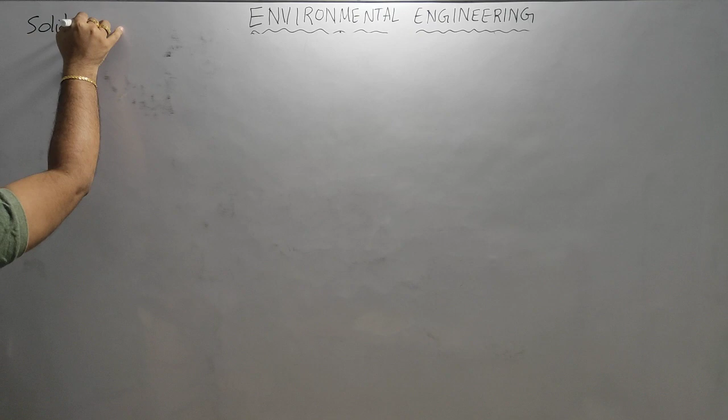Solid waste management. We generate two kinds of waste. One is the waste which goes along with the water from the house, that means whatever comes from washing utensils, bathing, cleaning of house, cleaning of clothes, whatever it may be. So whatever waste goes out along with the water is called sewage.

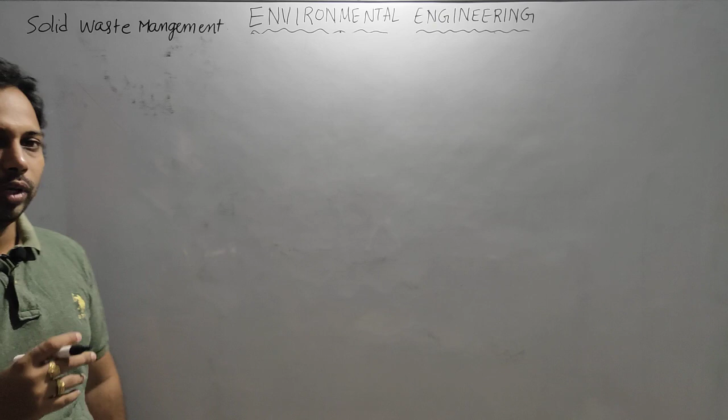If you look at vegetable cuts or litter paper generated by us, that goes directly into the dustbins. So we classify waste generally: some kind of waste we collect and put in the dustbin, some kind of waste we throw out of our vicinity with the help of water. Whatever waste goes along with the water is sewage, and whatever waste goes into the dustbins is solid waste, which we can hold and dump.

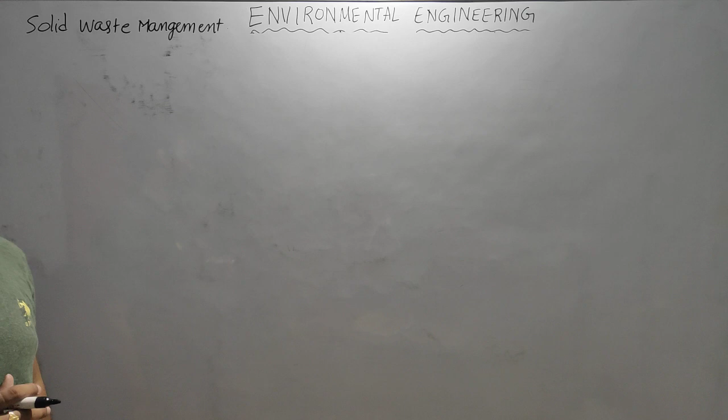This is an important mechanism required parallel to wastewater management. Solid waste management is equally important. Every day someone will come and collect the solid waste, process it, and treat it or dump it at a suitable location such that it does not cause harm to the community, and safely, eco-friendly, we can dispose it off. That is the main theme of solid waste management.

Generally, this is how the solid waste management system works. We generate the solid waste. Whatever generated solid waste will be collected by the municipal personnel, who will come and collect it daily. This may be door-to-door collection, or sometimes on-site handling, where we dump the waste in dustbins and they handle it from there.

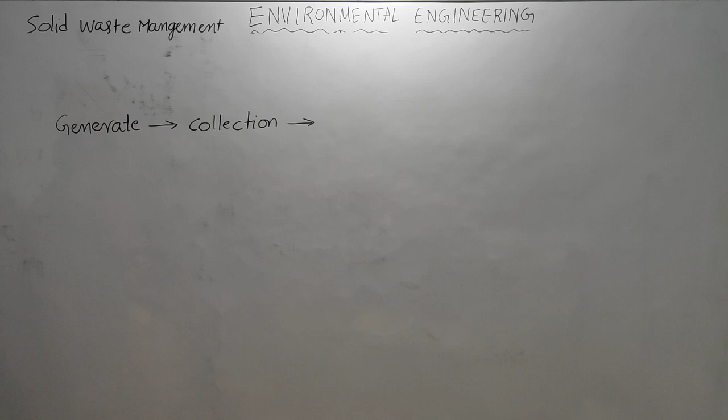After collecting, they will transport it using trucks to a location where we process it. If there is any recyclable material, that is nothing but processing, removing the recyclable material. Only what is decomposable and biodegradable, those materials we use for the decomposing process. That is processing.

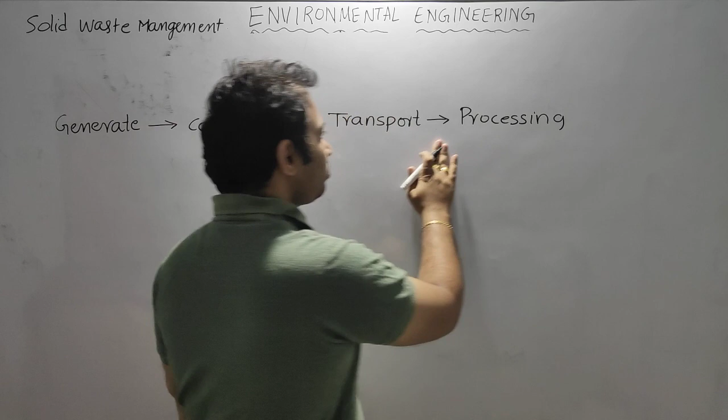After processing, we dispose it in a suitable way such that its strength gets reduced and it becomes a stable matter. So these are the sequential steps in solid waste management.

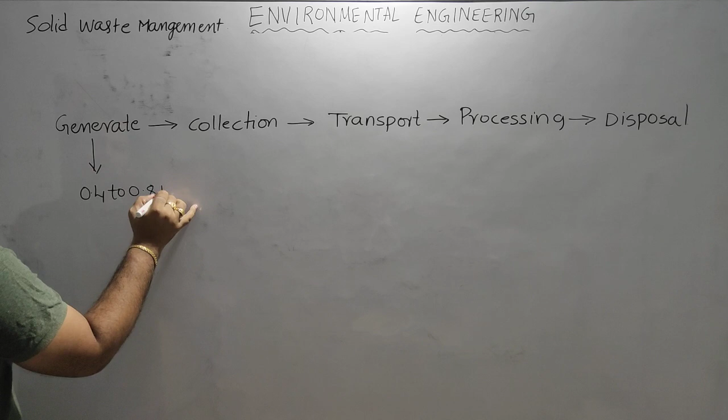Generally, we Indians generate solid waste of approximately 0.4 to 0.8 kg per person per day. This much generation we do on a daily basis.

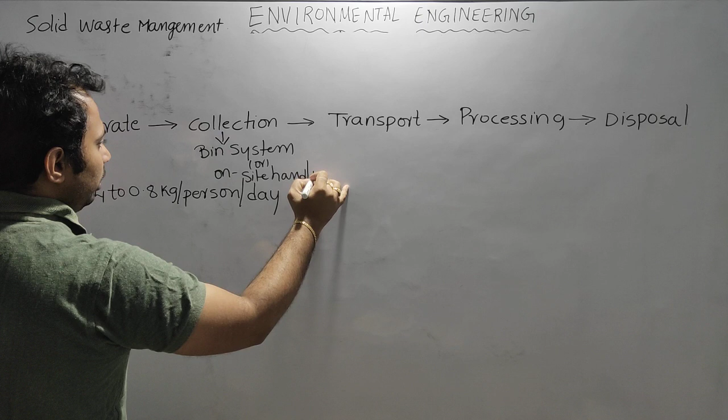Collection may be of two types: one is bin collection, the dustbin system, or on-site handling. In on-site handling, we take the dustbin to the location where the big municipal dustbins are, and dump it there. The municipal truck comes directly and handles it on site, rather than door to door collection, and they handle it from there.

For transportation, there is a hauling system. They lift the on-site dustbins, compact it, and take it away using trucks. For processing, we need to segregate the solid waste and remove unnecessary, recyclable materials, and as far as possible use biodegradable material for decomposition.

Disposal has many methodologies. This is the main criteria, because for every solid waste up to processing the method is the same, only the method varies at the disposal part.

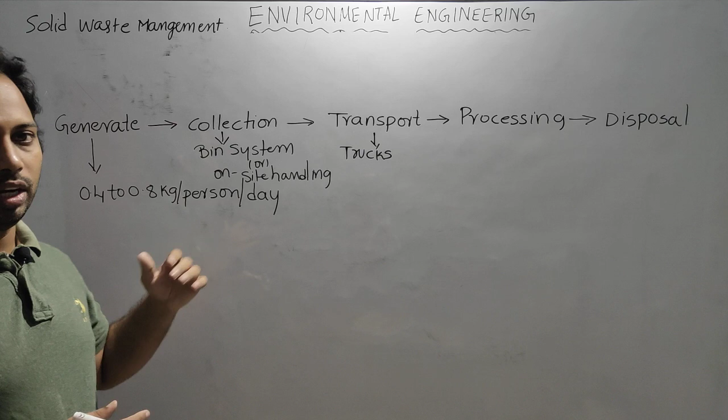Because different kinds of disposal techniques are available, depending upon the type of solid waste being generated and the suitability of the site, we need to choose a proper and appropriate disposal method which is eco-friendly, economical, and suits the solid waste generated by the public.

Let us see what is the classification of the solid waste. How do we classify it? Solid waste comes from many locations: homes and households, industries, hospitals, public areas such as parks. So everywhere solid waste is generated. We classify it based on the location of its generation, like this.

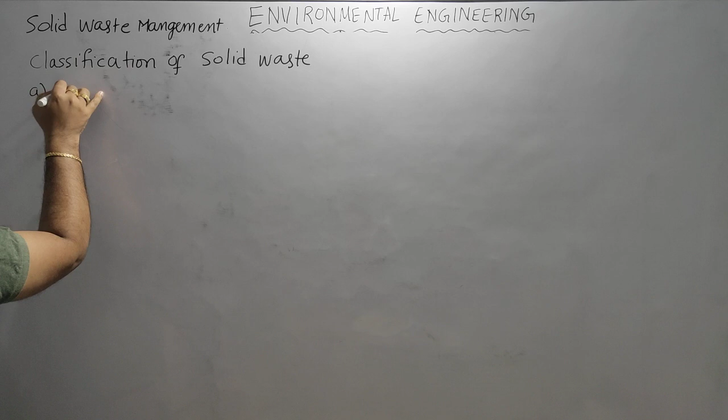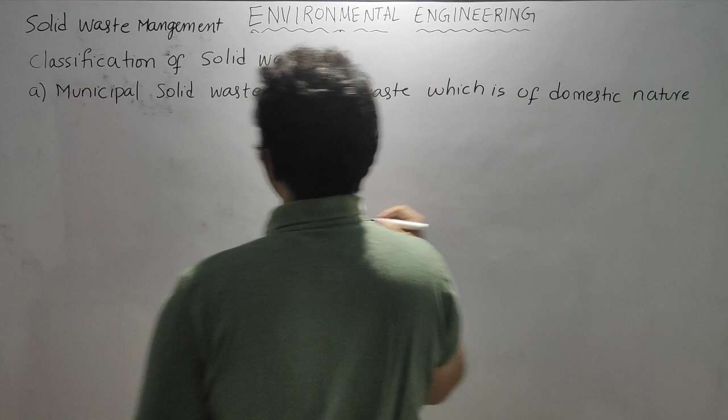Municipal solid waste. Municipal solid waste means the waste generated from households, general residential households, whatever residential solid waste is generated - solid waste which is of domestic nature - that is municipal solid waste.

And industrial solid waste, which is coming from industries. So solid waste which is of industrial origin - it is industrial solid waste.

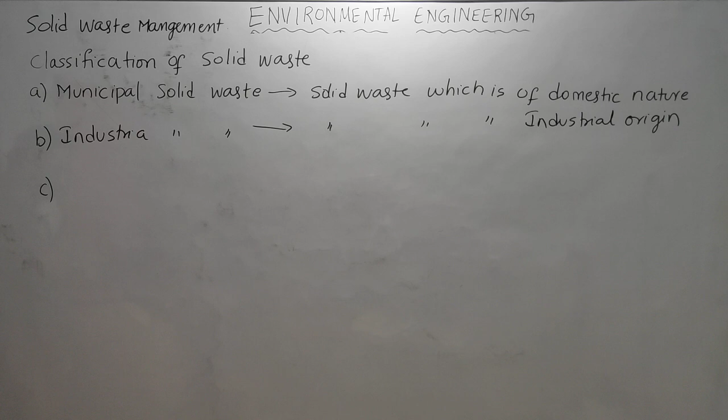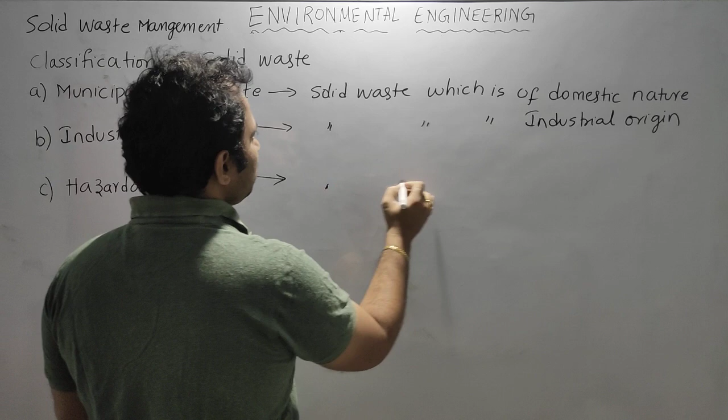And hazardous solid waste - some kind of chemical plants and also hospitals, like needles, medicines - these are all hazardous solid waste. So solid waste which is generated from hospitals and nuclear power plants, etc.

And some more are also there - solid waste coming out of open areas, that is public areas. It may be a bus stand, railway station, a park, or anything. It is open, access is there for everybody. So there the government will take the responsibility of solid waste collection.

Everywhere else we can fix the responsibility to the household, the industry, or the hospital - they will collect it and give it. But here nobody will come and give you, so we need to collect it upon our own. This is managed by the municipal authorities itself.

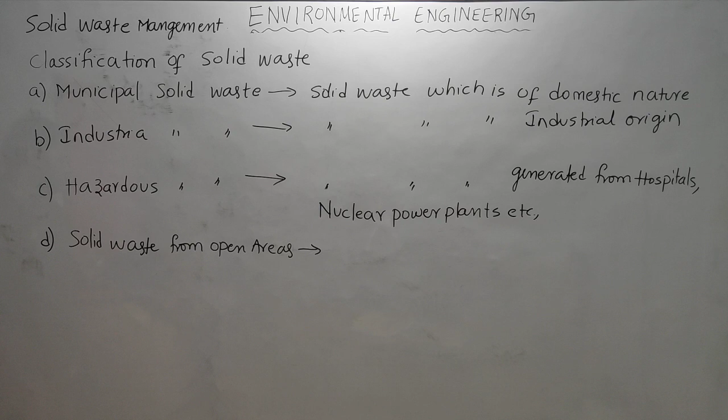So this is solid waste from open areas, and also plant waste - it is a type of solid waste. And also commercial solid waste, which is coming out of malls, schools - institutional. Solid waste generated from commercial locations such as theaters and all will come in this category.

So these are all different kinds of classification of solid waste. Now, how to analyze it? First we need to analyze - everywhere, whatever we have learned so far, whether water supply or wastewater, we examine physical and chemical properties necessary for our understanding, and determine those parameters.

Here also, for solid waste, it is necessary to know its characteristics. I have told you already that the disposal technique depends on the properties and characteristics of the solid waste. That is why it is necessary to examine the solid waste physically and chemically - we will understand the importance of these examinations once we see the disposal processes.

So let us see first what are the physical and chemical characteristics of the solid waste. We generally check the physical characteristics of solid waste.

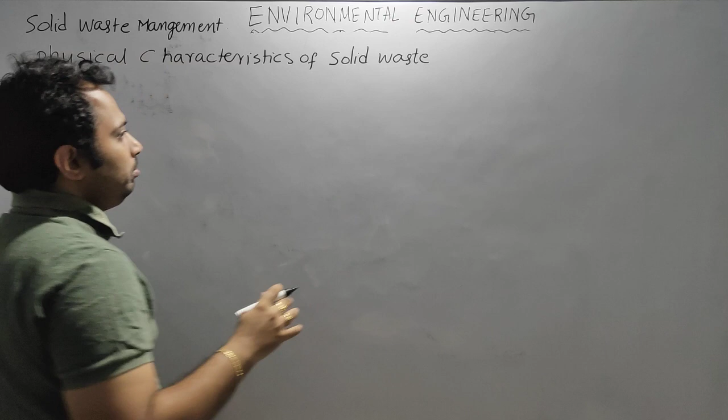We generally take this solid waste, dump it on the land, compact it, and cover it with a layer like an earth cover on top. This is how we generally do solid waste disposal - that is nothing but sanitary landfilling. Or else we do it by composting, where we send the solid waste into a trench and cover it up. So everywhere you see, solid waste is generally dumped into a low-lying area and covered - that is one way of disposal.

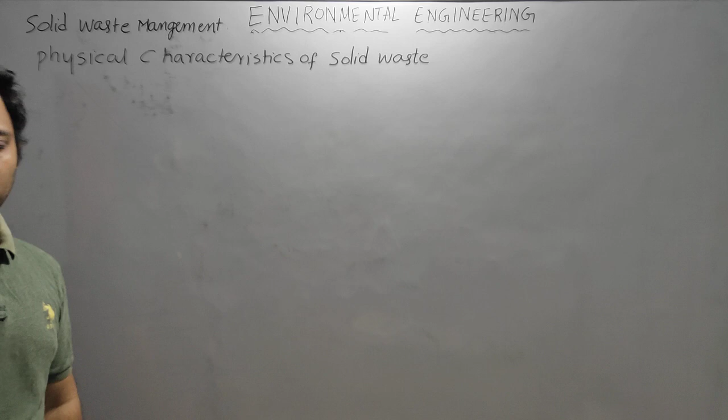Other way is burning it, incineration. So when we are dumping it into a trench, we need to know how much volume of trench is required for this solid waste. In order to know that, you need to know what volume of solid waste is coming into this trench.

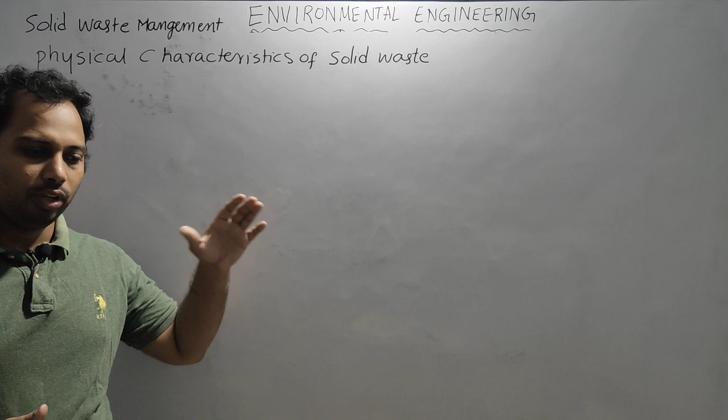So here the simple concept is, solid waste, you need to dump it in a trench. The trench volume required is nothing but the compacted volume, because we will compact it after dumping it into the trench. So if you know the compacted volume of the solid waste, then only you can understand how much volume of the trench you need to dig.

So in order to know these things, you can get the mass of the solid waste. That mass of the solid waste is a combination of different kinds of solid waste. It is not necessarily only one kind of solid waste. You will get some solid waste of leaves, some of paper, some of wooden cuts, some of vegetable cuts. So we will get different kinds of solid waste combinedly, isn't it?

So that means the density of the solid waste is dependent on the densities and proportions of the constituents. Depending upon the proportion and density of the different matter coming into the solid waste, the whole density of the solid waste depends. So the first physical property we need to know is the density of the solid waste. Once you know the density and the mass, we can find the volume of the solid waste.

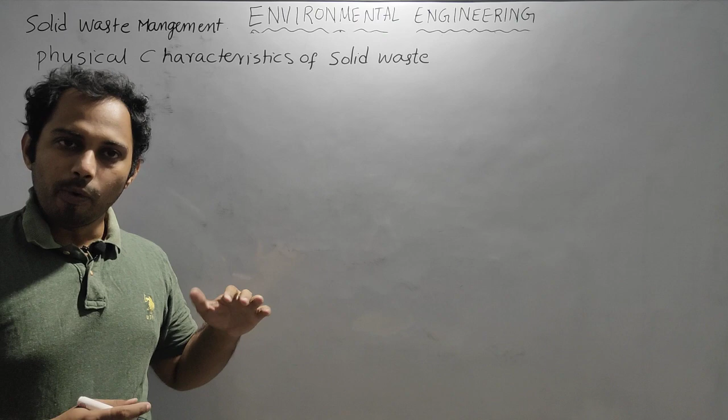And this is loose volume. So upon compaction, what should be the compacted volume? How much volumetric reduction is happening in the solid waste? That is required to finalize the volume of the trench, because once you dump the loose solid waste into the trench, we will compact it. So the final volume filled inside the trench is the compacted volume only. All these are physical parameters necessary to be understood for solid waste whenever we are dumping it.

And if you are burning it, incineration is nothing but simply burning the solid waste. We will discuss all these in the disposal part, but what is the importance of physical and chemical characteristics on the disposal? I want to correlate them. Burning can be done only when the solid waste is having calorific value. We already told you in previous sessions, methane is having a calorific value, that is why it is combustible. Calorific value is necessary for incineration.

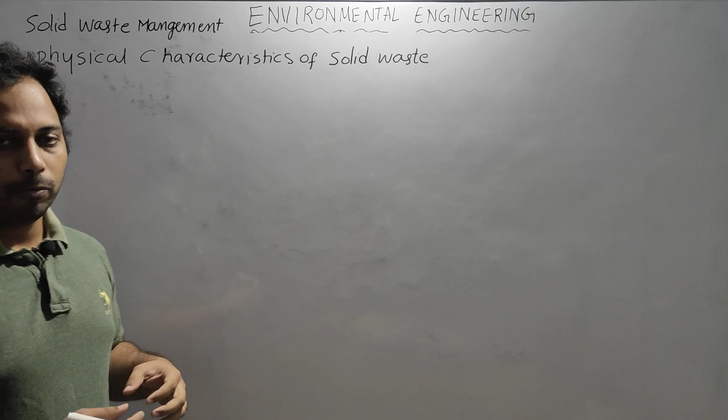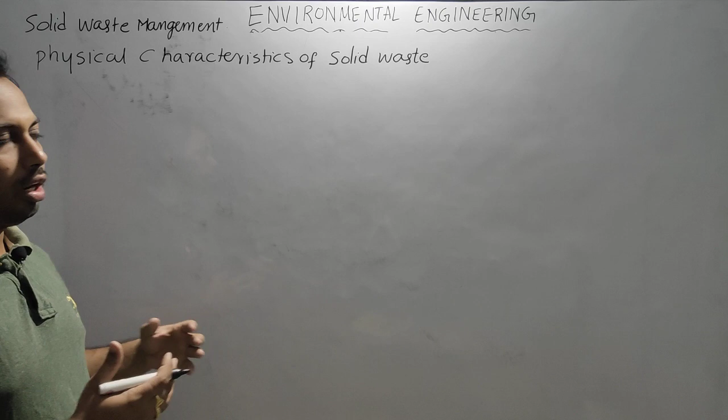So chemical analysis will tell you the energy, the calories, the number of joules present inside that solid waste, such that by looking at that energy content, we can say whether it is combustible or not, whether we can burn it or not. So what kind of disposal method needs to be followed? That is why the physical and chemical characteristics of the solid waste are very, very important for the disposals.

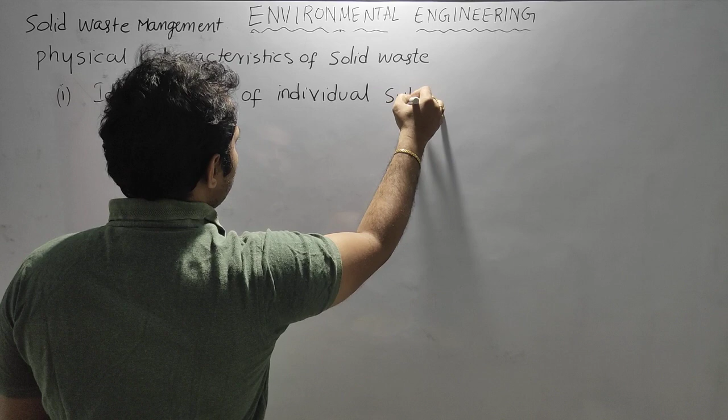Okay. Now, physical examination means what are the different kinds of individual substances coming into the solid waste. So identification of individual substances, and the proportion and distribution of individual substances.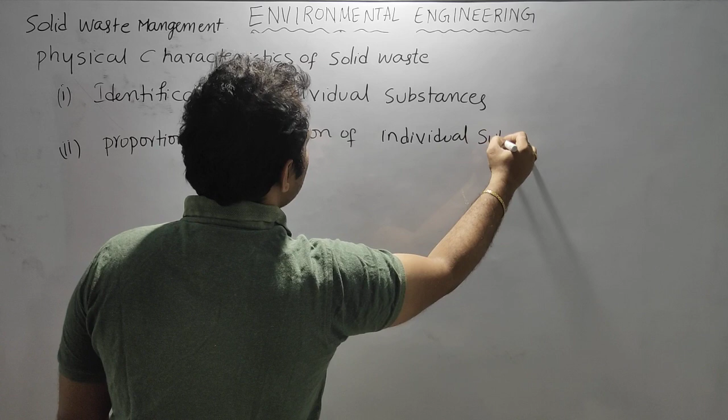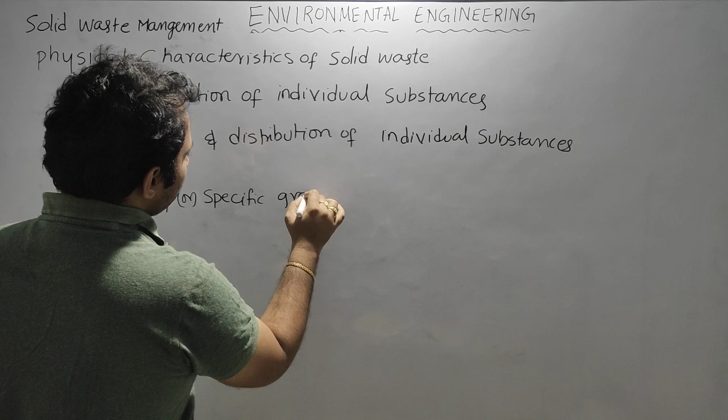And what is the specific gravity or density of individual substances which combined make up the solid waste? Okay. So if you know the individual substances' specific gravity or density, we will get the density of the solid waste. I already told you, in sludge digestion during the volumetric reduction discussion, a formula which we will reuse in solid waste management.

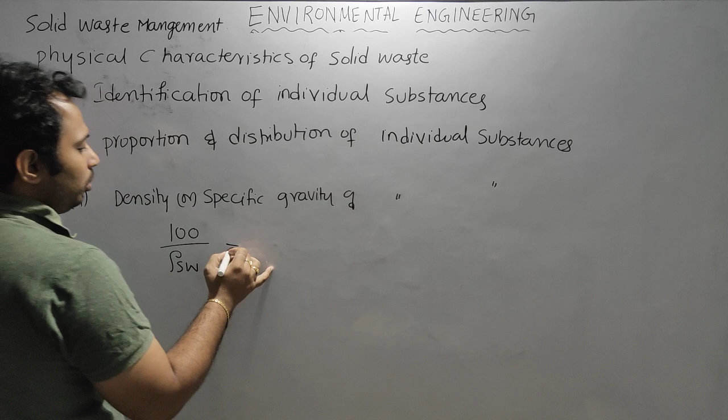So that is this formula: 100 by rho of solid waste is equal to proportion of A by rho of A, where A is one solid waste, plus percentage B by rho of B, another solid waste having proportion B, and another solid waste having a proportion of C by rho of C. So using this we can find the density of the solid waste.

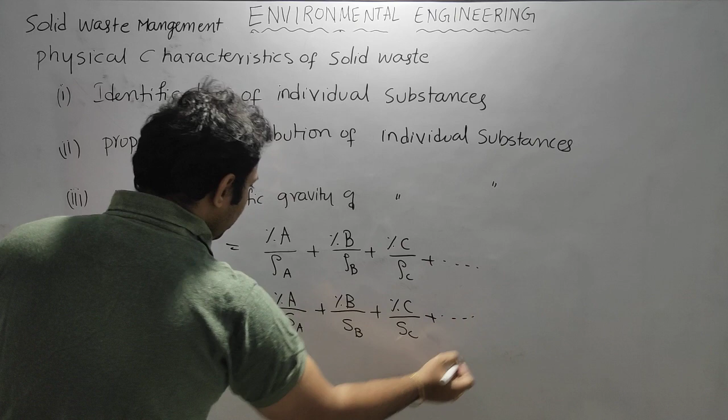Similarly, if you are taking it as specific gravity, 100 by specific gravity of solid waste is equal to percentage A by specific gravity of A, plus percentage B by specific gravity of B, plus percentage C by specific gravity of C. So likewise we can use either specific gravity or densities. In both ways we can find the density and specific gravity of the solid waste. Okay. This is a very important formula for our examination purpose.

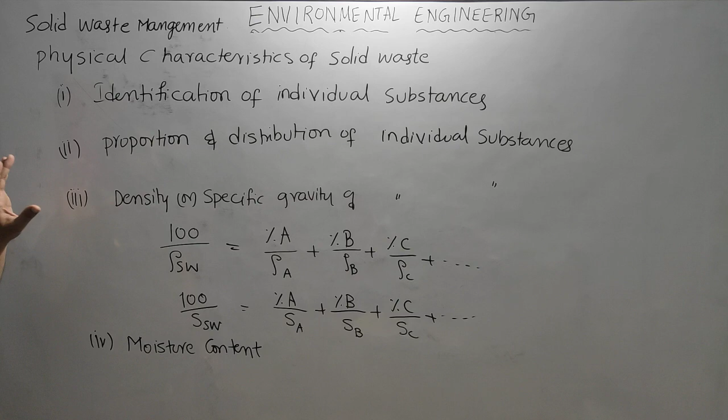And another important parameter we need to find is moisture content. So the moisture content present inside municipal or any kind of solid waste is also needed. These are the important physical characteristics to be determined for a solid waste. Next is chemical characteristics.

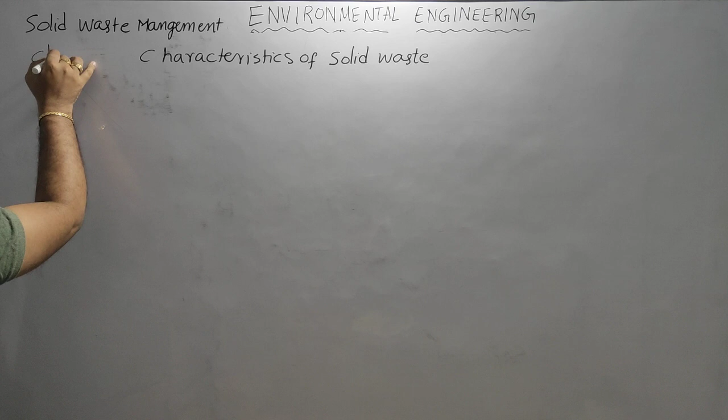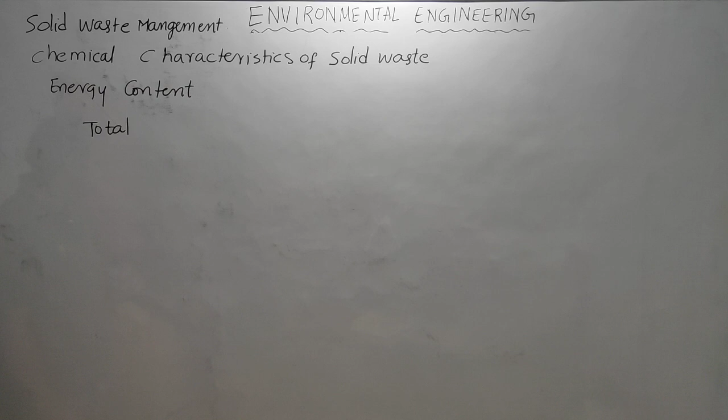Chemical characteristics of the solid waste. Chemical characteristics are nothing but energy. I told you already, energy content is very, very important for a solid waste. So, energy content of solid waste. There are three types of energy here. One is total energy as discarded.

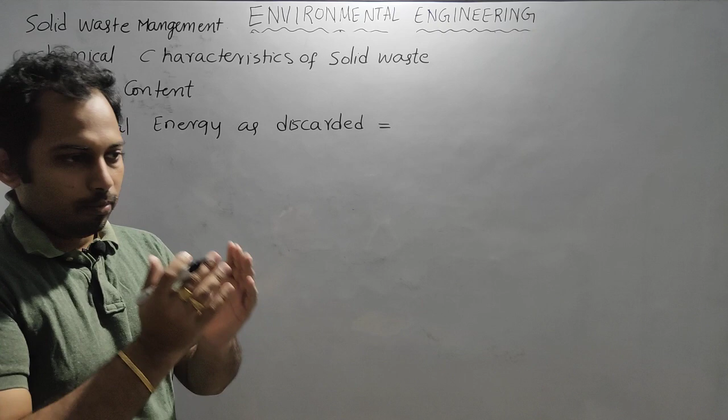Total energy as discarded: here there will be different kinds of particles, A, B, C, like that. A will have different energy, B will have different energy, C will have different energy. If you look at paper, it is easily combustible. A wooden cut is combustible but takes some time. Vegetable cuts don't take fire at all; their energy content is very less. So likewise, what are the different proportions?

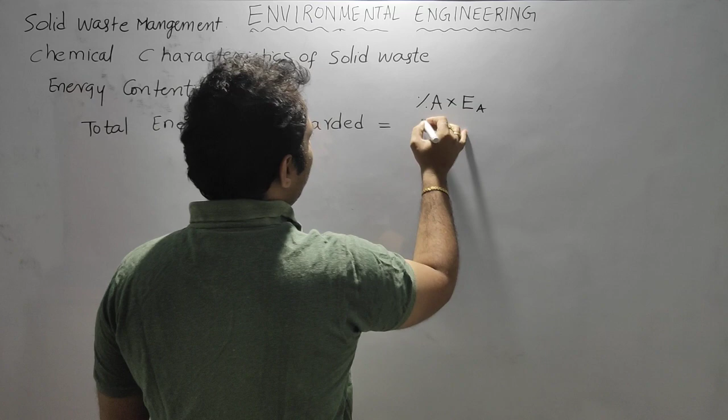For example, percentage A is a proportion having an energy content of EA, so percentage A times EA by 100 is the energy contribution of A. Similarly, percentage B times EB by 100, and percentage C times EC by 100. So likewise, how many types of material are there, what is its proportion, what is its energy contribution. By 100, because the total should be equal to 100.

So if you do like this, we will get the total energy as discarded. Again, we are considering this total energy including the moisture. For example, I have thrown a paper into a dustbin. It will be in contact with moisture present in other solid waste and will absorb it. So whenever we collect solid waste, we don't get every solid waste on a dry basis. It may contain a small amount of moisture.

So when we are talking about energy, the simple thing is, what is energy? Energy means how much energy is released on complete combustion, complete burning of it. That is nothing but the energy it contains. This is what we analyze generally, which is nothing but total energy.

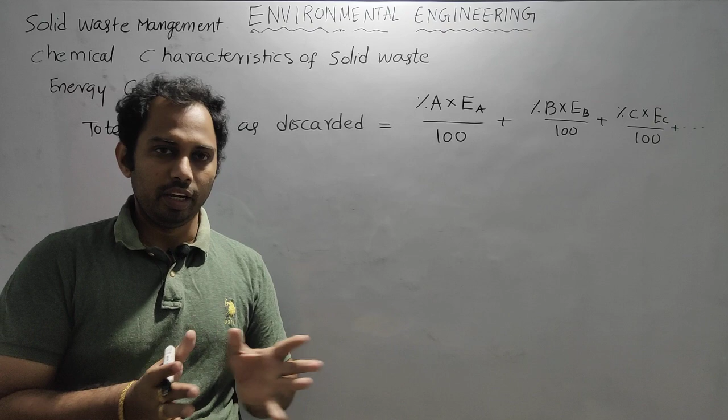But in fact, that energy is distributed two ways. One is to evaporate the moisture first, and then the burning takes place. So the energy is taken by two things, not only the material; some moisture is also taking that energy. So if you want to find only the material's energy, that is called energy on oven dry basis, or simply dry basis. Energy on dry basis.

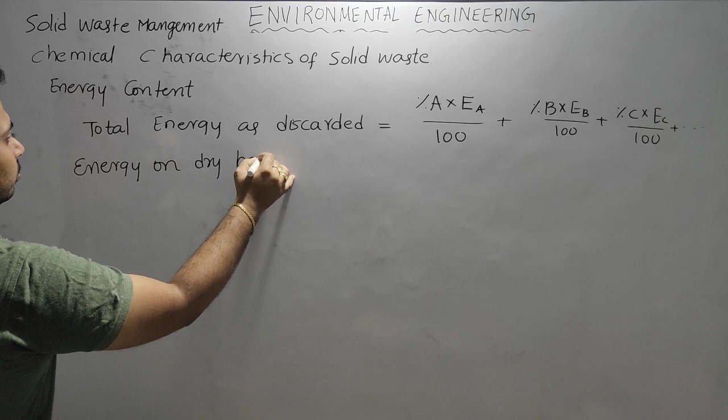Energy on dry basis is a simple thing. In this, what is the proportion of the solid? This is the proportion percentage, and it is having moisture also in it. In order to have only the solid, what do we need to do? We need to remove the moisture proportion and find it. So that is nothing but total energy as discarded.

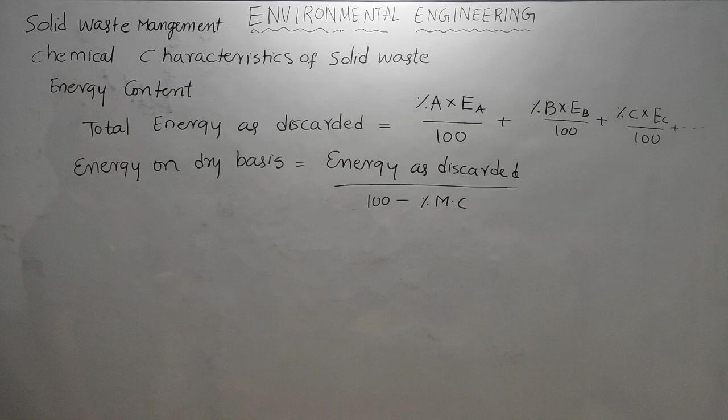Total energy as discarded divided by 100 minus moisture content. 100 minus moisture content. So if you do this, then you will get the dry basis energy.

Again, after complete burning, every solid will become ash. That ash will also take some energy. So that ash is not a solid, isn't it? Ash is not solid. So we only want the part which is burned, which is combustible. So then we call that energy on ash free dry basis.

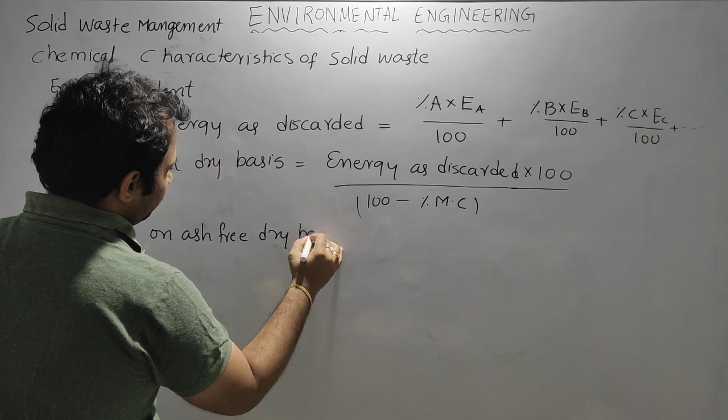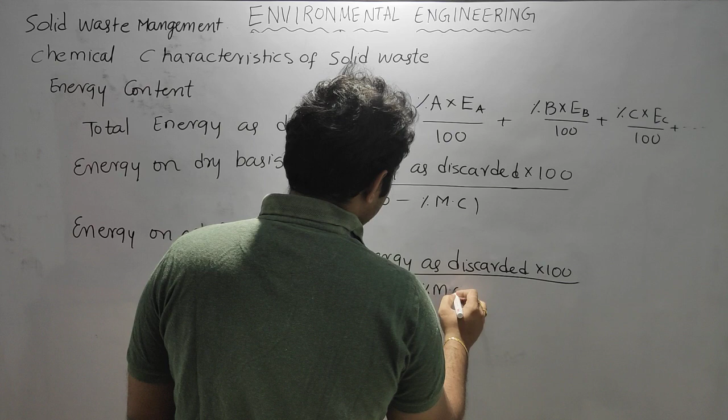We call that energy on ash free dry basis. That is equal to energy as discarded, because ash is also not combustible. That is why we divide by 100 minus how much ash is developed after burning. So if you remove this, then we get exactly the energy on ash free dry basis.

So this is the important chemical characteristic that we need to find. And along with that, what is the organic matter? This is important for incineration, burning. If you are dumping it in a trench, then we need to know what is the BOD. That is nothing but organic matter, biodegradable organic matter.

After that, what is the ash content? Whenever we burn it, what is the ash content that develops? Moisture content we will get from the physical property. Moisture is a physical property, ash is a chemical property, because ash will come only after burning. So these are the important physical and chemical properties we need to know whenever we treat any kind of solid waste.

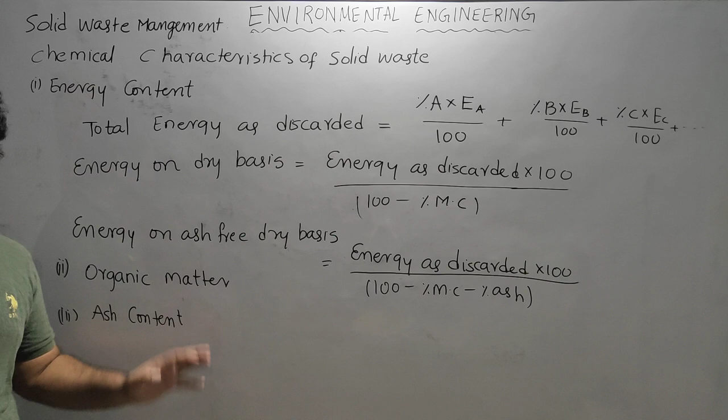Once the physical and chemical examination is over, how to dispose it? There are different kinds of disposal techniques. Every technique has its own advantage, its own disadvantage, and its own suitability. So we will study each method of disposal and understand why it is advantageous and why it is disadvantageous. After the disposal part, this topic is over, and we will do the previous GATE questions.

Disposal of solid waste. There are many methods for disposal of solid waste; we will discuss them one by one. First one is sanitary landfilling. Sanitary landfilling is very simple to understand. We will choose a location which is low lying, far from the city or community, not at all a residential area. There we will choose a low lying land.

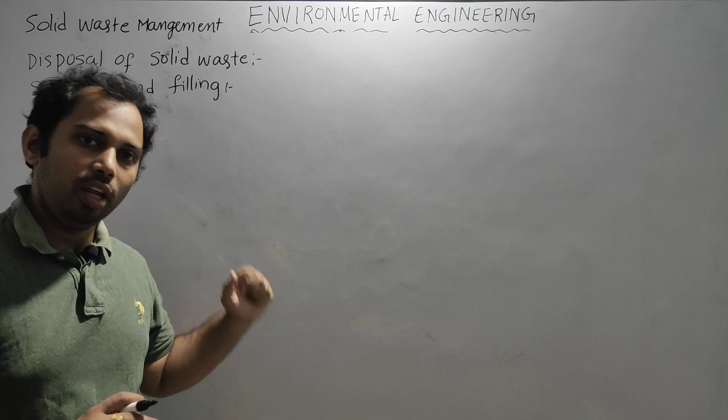We will take away all the solid waste generated in the community and dig a long, big trench. We cannot use the total land at a time, so we will channelize it. This is one channel, this is one channel, and likewise we will channelize it. Every time we will cover it up with the earth from the trench we have dug.

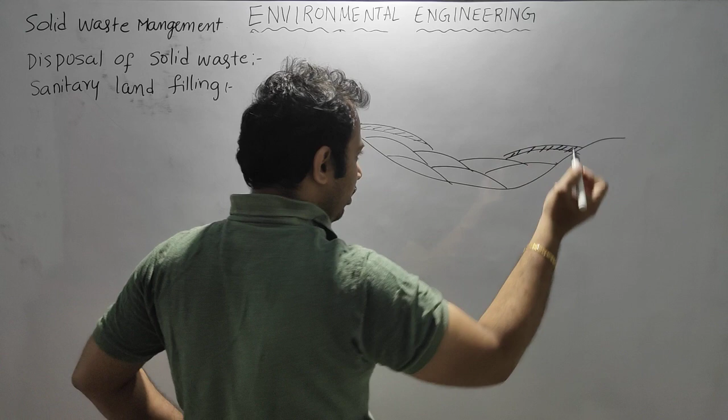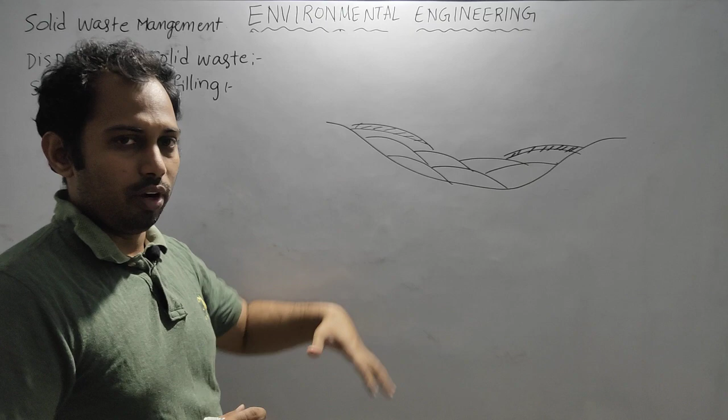We will cover them on the top so that vehicle movement is possible, and if you expose it, there will be a lot of problems with rodents, rats and insects. If you cover it up with a good amount of earth, we can prevent all this. Also we have to transport solid waste to other locations, which is possible only when you cover it with good earth. So likewise we do sanitary landfilling.

Here in India, 90% of the landfilling we do by sanitary landfilling only. This method is followed. Okay, here the disadvantages of this method

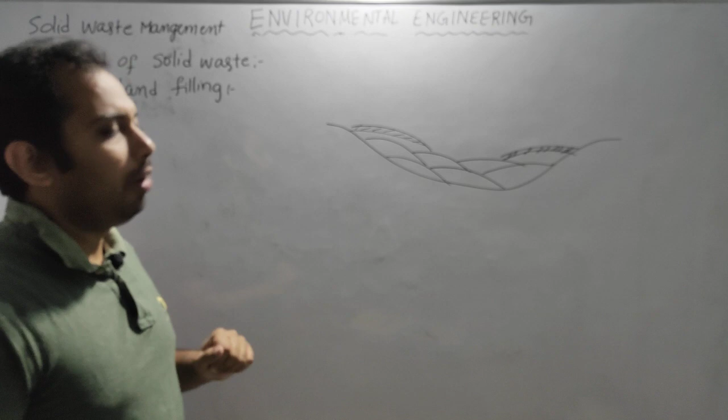are, the main disadvantage of this sanitary landfilling is, whenever rainwater falls on this sanitary landfill, the rain seeps into this trench, and it will travel through this sanitary landfill and come out. Whatever rainwater travels through this sanitary landfill collects all kinds of poisonous matter inside the solid waste and comes out like a liquid fluid that is called leachate.

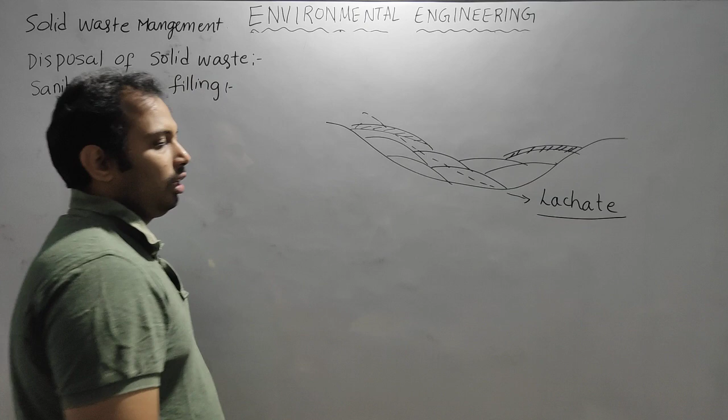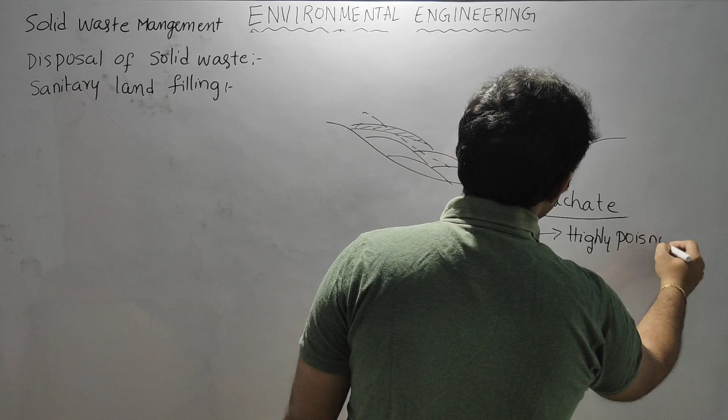So this leachate, that means whatever fluid is coming out of this sanitary landfill, that is nothing but leachate. This is a very highly poisonous fluid. So that is why we need to keep it away from the communities, and also we need to choose suitably a low lying area.

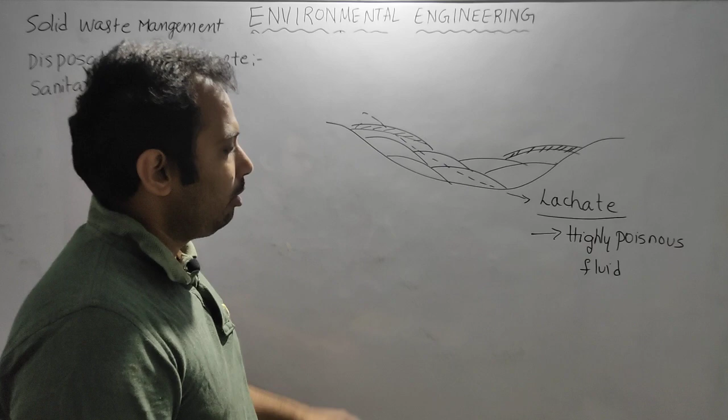And to prevent this leachate also, what we do is we generally use an impermeable membrane at the bottom of this trench, such that any kind of these leachates does not leak. It will be arrested inside. That is a remedy for leachate control.

And also another problem is it needs a lot of land, and low lying land. These days finding land is very difficult, and that too far away, because everywhere we see some kind of residential activities going on. So finding land is continuously difficult.

If you look at Okhla in New Delhi, there the sanitary landfill became like a big hill, because of dumping again and again on the same location due to non-availability of land. So that is the disadvantage of sanitary landfill, but the advantages are it is very simple and economical. Technical expertise is not needed that much.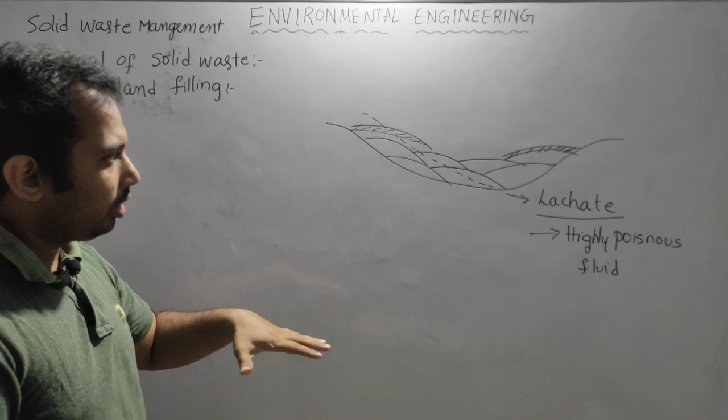So directly dump it in the sanitary landfill, compact it, cover it, and go to the next bay and dump it, compact it, and cover it. That is the only thing which we do. And also we don't do any processing here. We don't separate the different kinds of matter. We do all together, just simply dumping it, that's it.

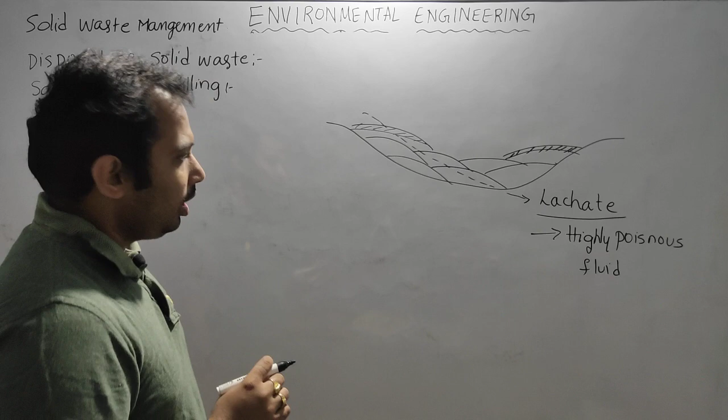And here in sanitary landfilling, both aerobic and anaerobic processes take place. It starts with an aerobic process, goes to anaerobic process and again ends with an aerobic process. Because of the presence of oxygen at the beginning, aerobic process will take place. Soon after the free oxygen is exhausted, anaerobic conditions will prevail.

And these anaerobic conditions lead to acid formation and methane formation. Bacteria will come and form methane. Aerobic bacteria use that methane as an energy source, and again the aerobic process will start at the end after the generation of methane. So likewise it happens inside the sanitary landfill.

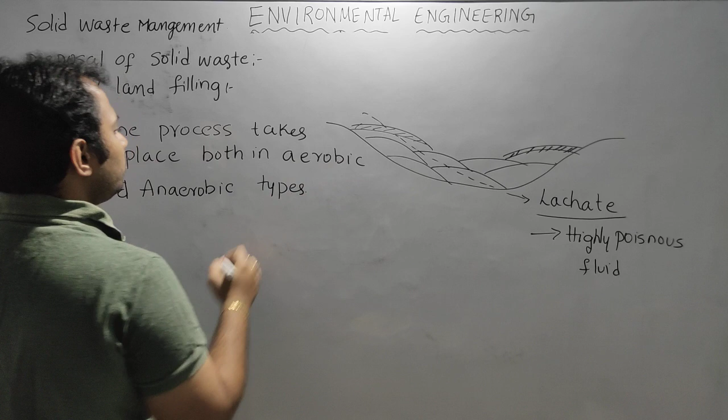The process takes place both in aerobic and anaerobic conditions. Okay. So that is another problem. Leachate is another problem. So this is all about sanitary landfilling.

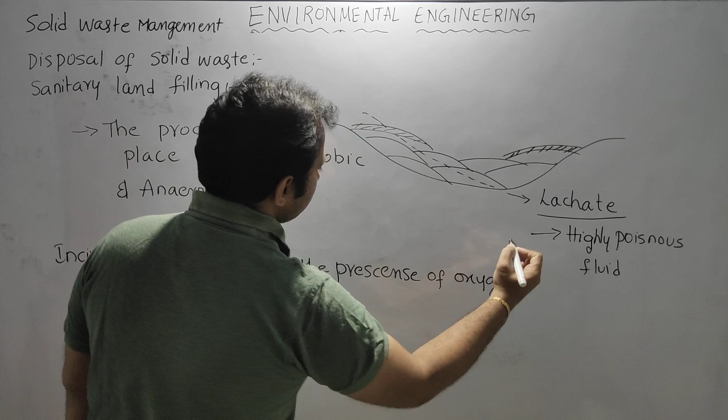And now we are moving on to the next type, that is incineration. Incineration is nothing but simply burning in the presence of oxygen. But the solid waste should burn, then only we can burn it. If it is not burning, how can we burn it? So this process is suitable only when the solid waste has high calorific value.

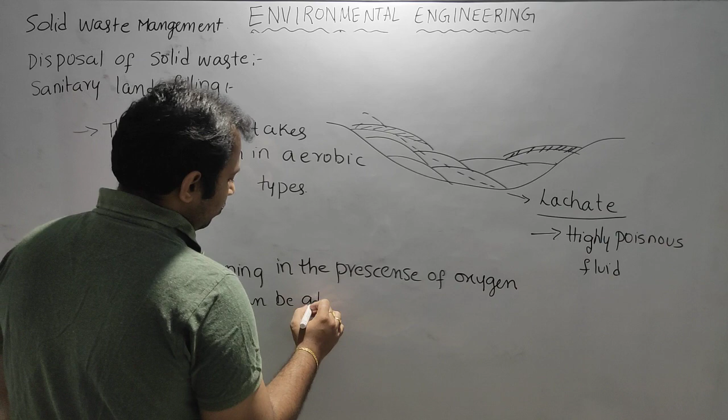So this process can be adopted only if the solid waste has high calorific value. But generally in India, we Indians consume low calorific food mostly. In the US, they consume high calorific food.

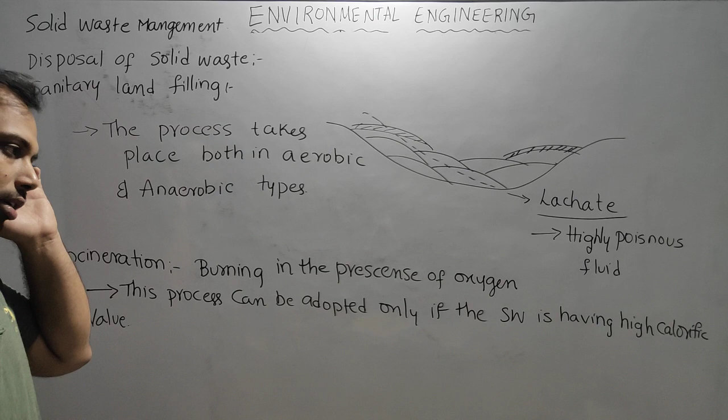So generally, incinerators you hardly find in India. An incinerator was installed in Delhi, but because of not getting proper solid waste into it, because as I told you already, whatever food or solid waste we consume will have low calorific value, these incinerators do not suit India.

We don't have any incinerators in India. Once an incinerator was installed in Delhi, but within 3 to 4 years it was closed because it was not working economically. So incineration is simply burning. But the problem is that during burning it releases a lot of air pollutants. That is a problem with incineration; it is not that eco-friendly.

But this method completely destroys the solid waste. In any other method, some solid waste will be left over. In sanitary landfilling, before and after digestion, the volume of solid waste reduces by 2/3, so only 1/3 of the volume remains, like how sludge digestion takes place. Similarly, the digested solid waste reduces its volume and compacts.

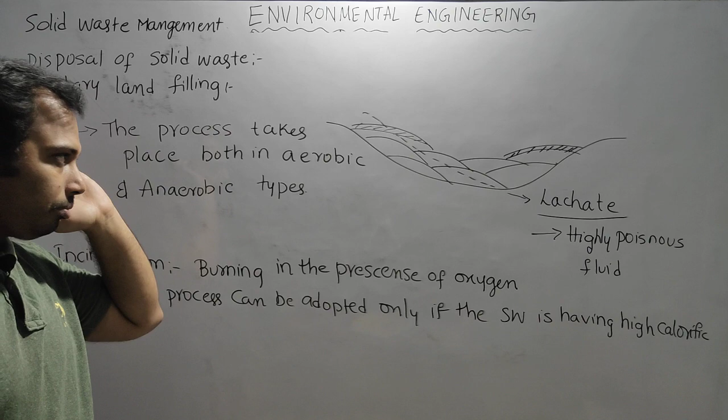After solid waste composting, it becomes manure, and we use it for crops. That is a common thing. So there something comes out of it, but here nothing comes out; only ash is left over, which is of no use. That is the only problem.

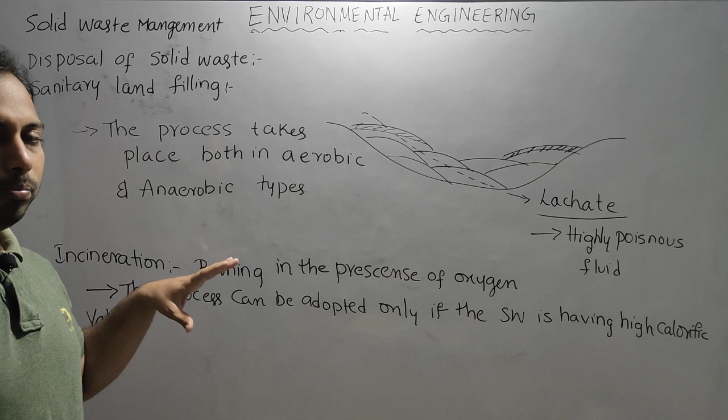We can completely destroy the solid waste. That is not a problem; that is the special property of incineration, whereas in other methods we don't find that. We find some kind of end products. Here the only end product is ash. So this is the incinerator, briefly. It is not that much needed for us because we don't use it much in our country. So next is pyrolysis.

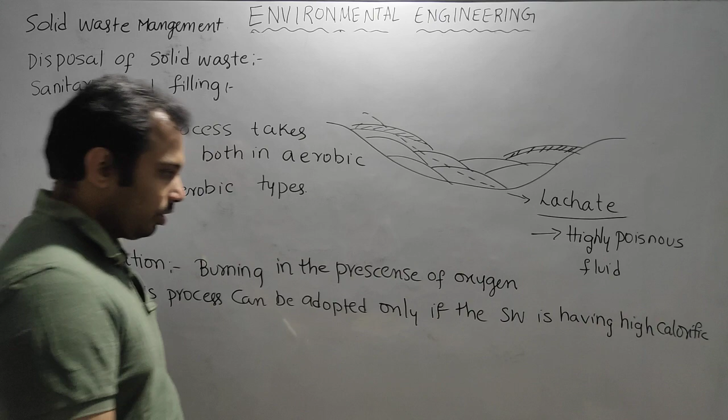Incineration is an exothermic process. It gives out energy, because we are burning it, we get energy, that is heat, coming out. But pyrolysis is burning in the absence of oxygen, or air. Burning in the absence of air is pyrolysis.

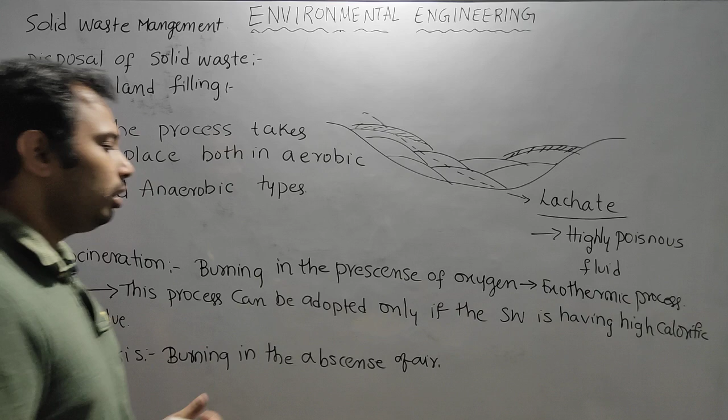Here we generally use carbon matter like plastic and rubber, which are non-biodegradable. Those things we generally treat by pyrolysis. Burning in the absence of air is nothing but destructive distillation, so we also call pyrolysis destructive distillation.

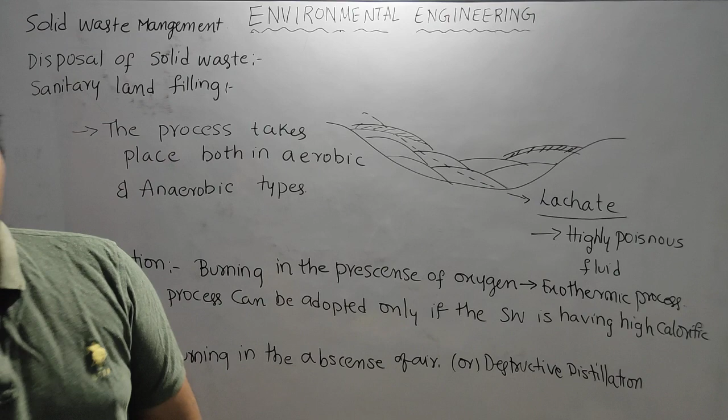This destructive distillation process is an endothermic process. We need to supply heat during this process. It needs energy. Whenever we are doing pyrolysis, some part of the solid waste is converted into different kinds of gases, like CO2 and CH4.

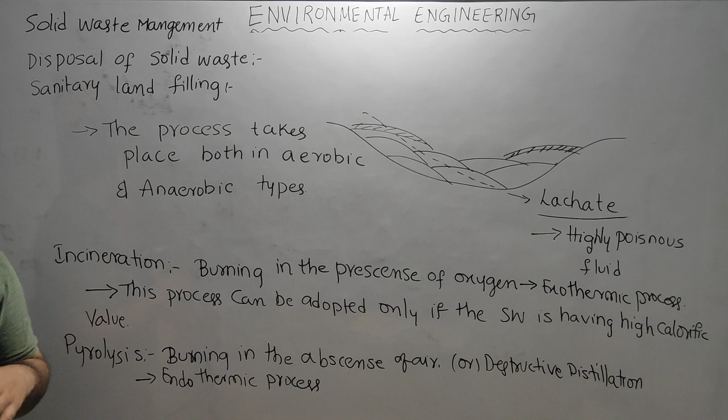So different gases come out of destructive distillation, some amount of liquid is generated, and some amount of solid. Liquids such as liquid tar and oils, and solids such as solid tar, develop out of pyrolysis. So whatever solid waste you send into pyrolysis is converted into three types: gas, liquid and solid. They still have some calorific value.

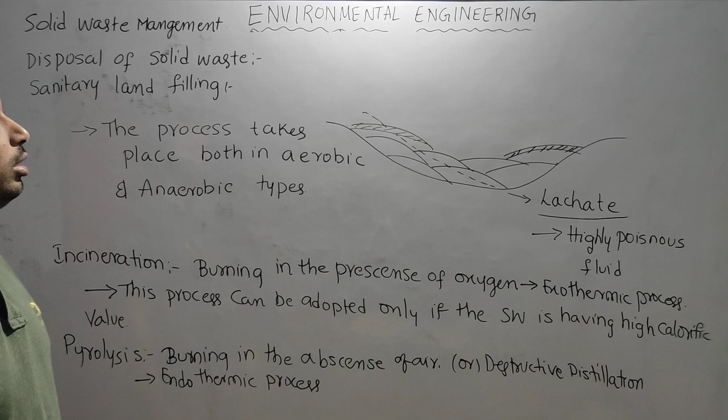We don't completely burn them. After that we need to use incineration for complete destruction. Here it won't completely become ash, so some energy value will be present even after pyrolysis. So that is pyrolysis. Even this we don't prefer in India.

There are two methods left over, that is pulverization and composting, which we will discuss in the next session.